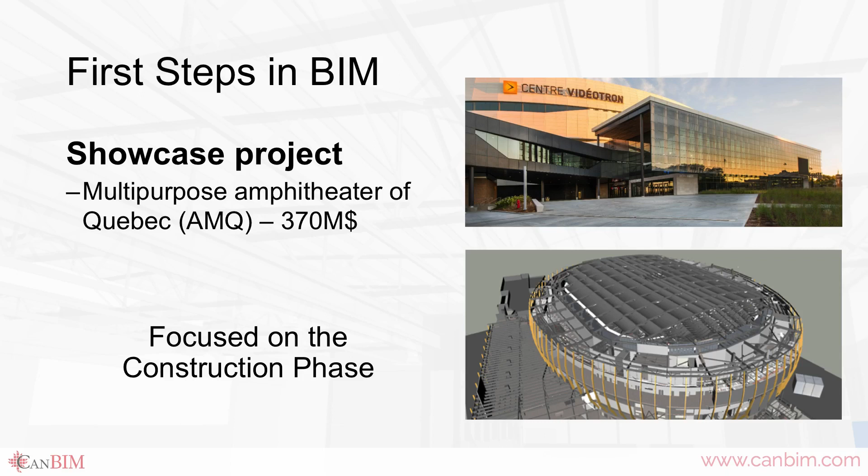How we started in BIM: we had the chance in 2013 to work on the amphitheater project. It's a project that was realized in traditional mode, and then we went to the construction phase.

We gave the construction mandate to Pomerleau, which had multiple technical experts. We took some plans for construction, and we integrated all the plans with BIM for construction.

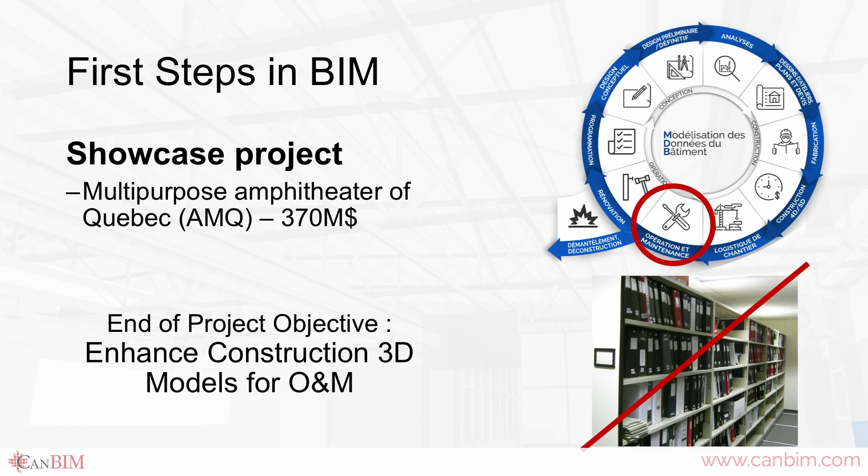There have been some issues naturally, but we finished at 370 million. It's not all because of BIM, but we realized the collaboration, the approach of having people around the table, the exchange between owner, contractors, and professionals was key.

We build before getting to the construction site. We actually get to the construction site and everything is there, no dismantling, no issues on the construction site, or much less issues.

We've seen this before where the plumber doesn't get along with the electrician or with other contractors, but there are plenty of benefits with BIM that helped us with the logistics on the construction site.

What helped us as well is a digital model. We have to have a 7D BIM model to avoid what we see on the screen, all the paper, the USB keys. We'll bring it under digital form to use it for operations and maintenance.

We delivered the project after that, and it was a challenge. We have to make a bridge between the projects and operations and maintenance. This is an organizational problem.

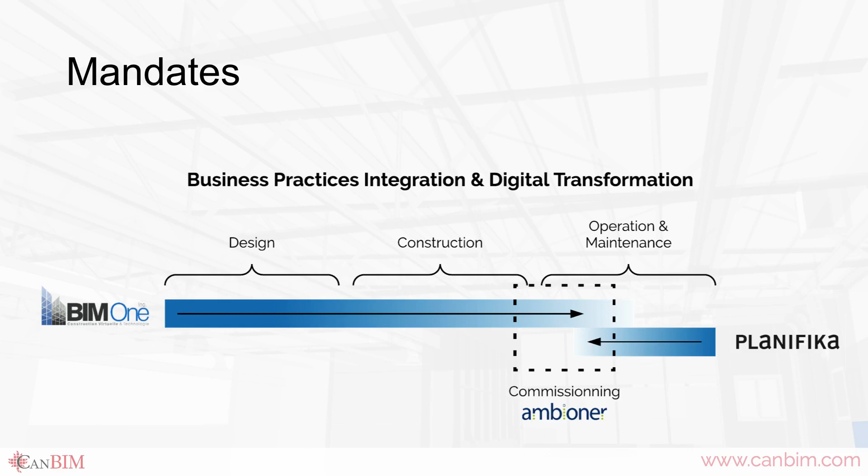So after 1 year of going into pilot projects with community centers, we wanted to start working with BIM regarding community service centers, and we realized that we have to request BIM basically on these projects. We have to work with some competent consultants. There's BIMOne that helps us with all the coaching, the processes.

Everything that's technology related in BIM. And we gave another mandate, which is by Planifika, which is asset management related to BIM. Define requirements, see in which manner the entire life cycle management could be optimized. During this process in the last year, Ambioner joined this process.

They helped us take into operations all the information collection through operations and maintenance. So we're talking about standards, the naming of equipment and systems, in which information do we actually transfer it to property management or operation software. We have our trio, and our first trio is right there on the screen: BIMOne, Ambioner, and Planifika. And what's important is we have some good results up to date.

So as you see, the City of Quebec went for a call for tender, and we won this tender. And we came in this context, and we had to put in place all these processes, and that was a challenge. The first point regarding this is I will talk about the BIMOne approach.

So as a client, I wanted them all, everything on the screen. So Frank told me, relax. So yes, ultimately we want to get there, but we have to start correctly. So this vision, these objectives that are very high.

And management said we will go in a big change. We don't want to create tribes or groups, some people that do traditional and people that do turnkey projects. So you have to break this concept. So we will do all our projects henceforth in BIM. So we said, Frank, let's go. But...

So we embarked on this, and we said it takes us some reflection time. We cannot just start these projects and expect everything will be great. We have to do a reflection exercise just to think about where we're going, because BIM is not BIM that does the work itself. It's people that actually work, and this involves processes and whatnot. So we've done a lot of coaching projects, and in this case what we did is we talk about 3 fields of BIM.

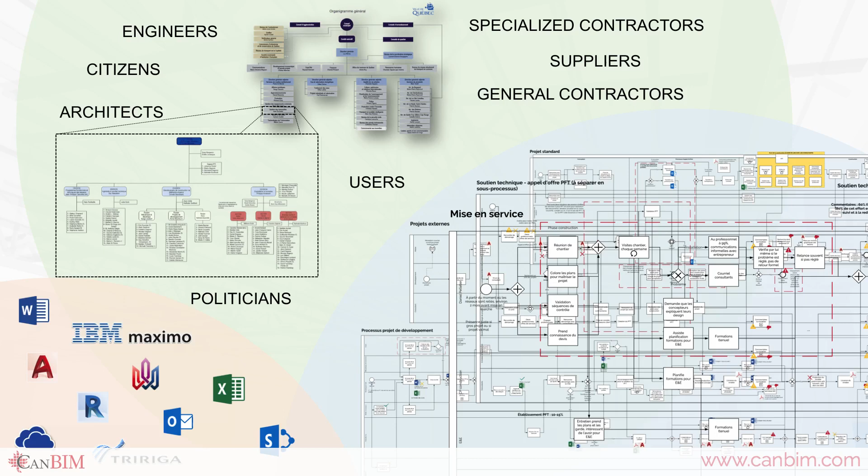There are different people, such as Bilal Succar, that talk about this. The first field has to do with governance, the people. We see in an organigram of management, an organizational chart of all the interrelations between the different stakeholders in the project and the organization. What is the relation between people on the project? This service is included in a bigger chart, the City of Quebec. There are a lot of different departments, and it's important to understand who needs what information, who has the approval mandate.

There are a lot of people involved: specialized contractors, suppliers, users participating in this project. We had to address all this, so we did some interviews with people, process interviews, etc. For people who think BIM is only for professionals, architects, and engineers, you're wrong. It's everybody, the entire chain, everyone.

There's a lot of work that was done regarding this, and we based all our reflection on the processes. If you want to innovate, if you want to bring lasting change, you have to change the organization. We cannot just change the technology.

First, there will be some challenges, and we know there's a hype chart. There will be some high expectations, and at a certain point it doesn't work. So for it to work properly, we have to have a proper organization.

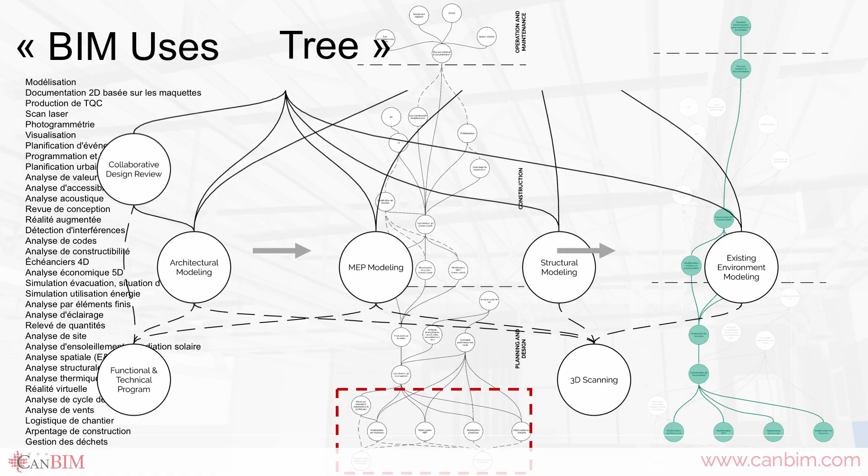When we take a look, the conclusion, or the ultimate objective, is to have models that we can use. And with that, the City of Quebec, being a client, being an owner—even if there's a service of updating the models—the starting point is the professionals for these BIM models, the architects, the engineers, etc. So we had to do an exercise of structuring all this information and all these BIM models.

So once we clarified all these situations, we had the list of tools to develop, to clarify what we need. We created this chart that breaks it down by theme, and it allows us to know how we can frame this information in a way to deliver the project.

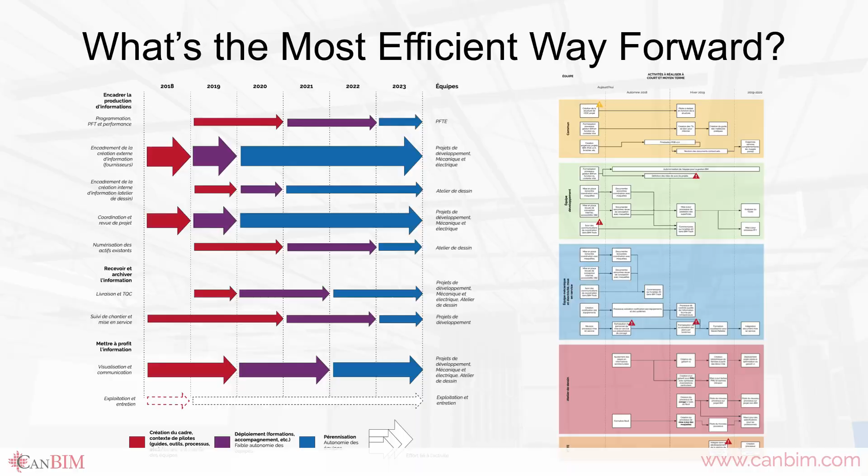Projects that are assimilated. So we see also another program which is team by team. Every department will have a group of activities that is planified to transition into BIM and to have a BIM process. You did a great job, Frank.

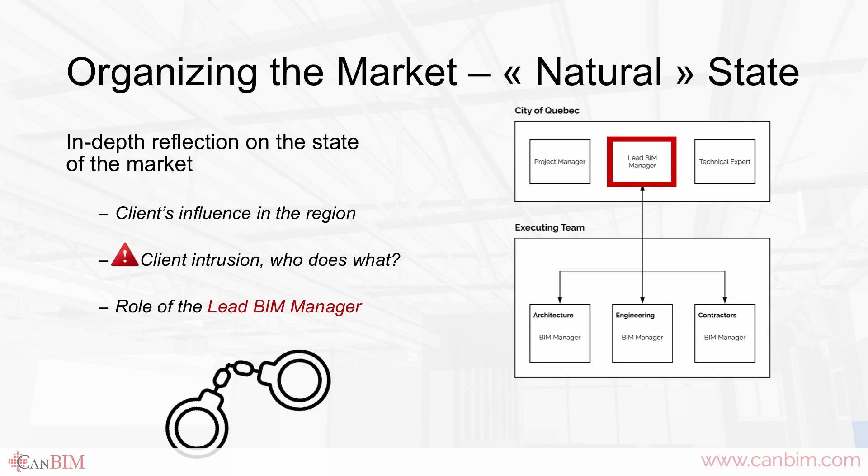So we had a reflection regarding this because we had an important client, but we had this management of the client towards the professionals. So instead of asking a deliverable from the professionals, we communicated a lot about ways of doing and management, and we handcuffed the professionals basically with their ways of working because of past projects.

So BIM changes all the time as well. So when we follow the evolution, it's important to keep in mind the norms and the standards, but you have to keep in mind that within 6 months, all the technologies can change, and the actions that were very useful 2 years ago, today are not pertinent anymore, and vice versa.

And people will penalize you on projects. So there's this whole notion. There's also something we noticed: the lead BIM manager found on the client side had a different understanding of the market, because people expected the lead BIM manager would be responsible for coordination in the collaboration spirit. The BIM manager is responsible for collaboration in terms of BIM models.

So we have a problem because the client had to coordinate all the models, which is not his role as a client. So we worked to redefine this to say the lead BIM manager will have one in design and one in construction. So the management of professionals remains in their court, and we have a new transition towards documentation. We started coaching people at the city so that lead BIM managers would report to an expert to approve the good ways proposed by the professionals.

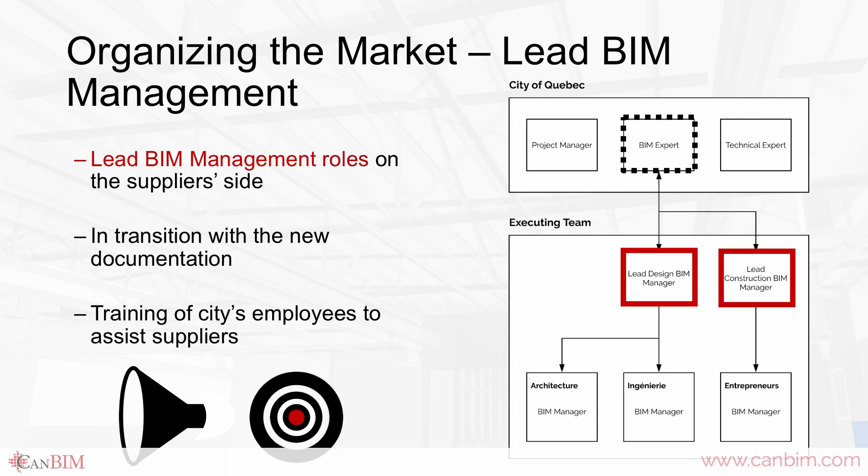And we are not in this prescriptive mode where we force people to do things a certain way, but the work gets done in an equivalent way.

I just want to mention that there are 7 pilot projects. So all these things apply to these 7 projects, and we had some issues when we readjusted. We don't have a project yet that has done the entire cycle or an entire life cycle, and this is why we're always having these reflections, and this is why BIM1 is defining all these requirements on paper.

So regarding documentation, we see historically that in Quebec we have this distinction between the BIM management plan versus the BIM execution plan. So BIM management is on the part of the client—it explains what they'd like to have. And the BIM execution plan explains how they're going to execute the project.

So we saw that many BIM management plans included a lot of execution topics. So we reduced this and took out the sections that apply to execution, moving them to the BIM execution plan. And we had some documents that were very long, and we reduced them to 20 pages.

And the documents currently are much more prescriptive than descriptive. The level of maturity is not the same for all stakeholders, and there are some just starting out in BIM. So we had to have some documents that are more application documents, explaining the philosophy behind it. The documents are much more prescriptive and direct, but they're also flexible.

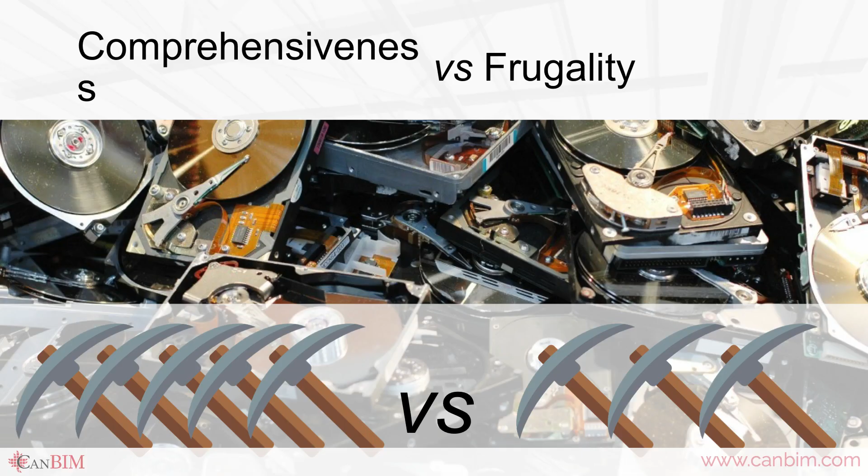So administratively, it's a lot of work to collect data, a lot of data re-entry, because a lot of technical data comes in PDF format, and entering it in the database means a person is entering it manually. It's done by the client, but also by contractors. And because there's a human entering this information, there's always a risk of error. So there's information that is validated by the manufacturer, but you're putting another layer of error because someone is doing data entry in a structured database, and we have to do quality control. So there's extra work to be done.

So versus frugality, we only take what we need, so we have only the information that we can control much more easily. And also there is a cost associated to that, because it's not done automatically, there's a cost associated to this. So it represents a certain challenge to work in this case.

So when we are trying to find the essential information, we are diminishing these costs. And another consideration is a lot of people are involved in this process versus one person. We know it's not just one person involved, but it's the principle of having fewer people working regarding the added value.

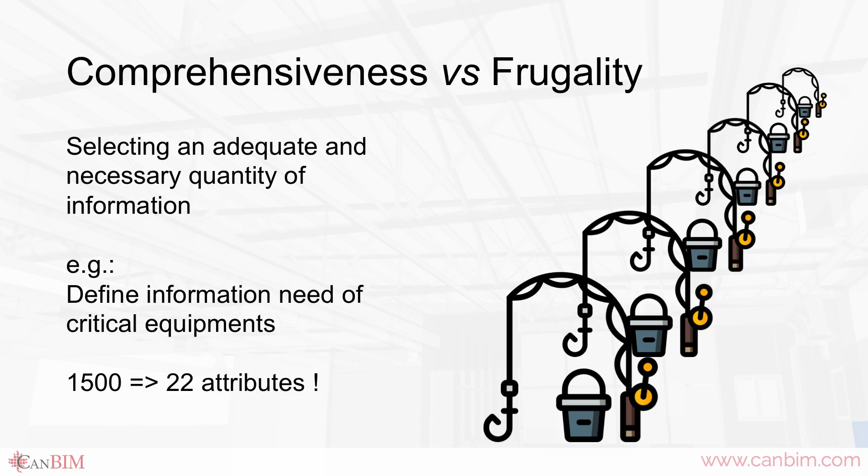If you're getting all this information and you select the actual element in the model, or you scan the actual element and go into the technical specification sheet, do you actually get your objective? The majority of the answers is yes. So we could start in this way. It's a tiny improvement, but has huge added value.

So it's not because we weren't frugal at the beginning that we can't improve this. The start is much better. So the notion behind this, and there's a conference right now regarding COBie, is that we talk about standards. When we talk about operation and maintenance, we talk about COBie.

But you could also check out what is happening with IFC4, which allows you to have the information stored in IFC4 versus COBie, and people aren't used to using these standards, so it's important to choose the right format.

So we took a look at these possibilities, and we have some parameters that identify the specific parameters of the city. We speak French, as you know, so we had to look at parameters in French, taking into consideration translation from English to French as well. So the connection between Revit and Maximo required us to redo our export standards. But when we talk about technical work with COBie, we work with XML.

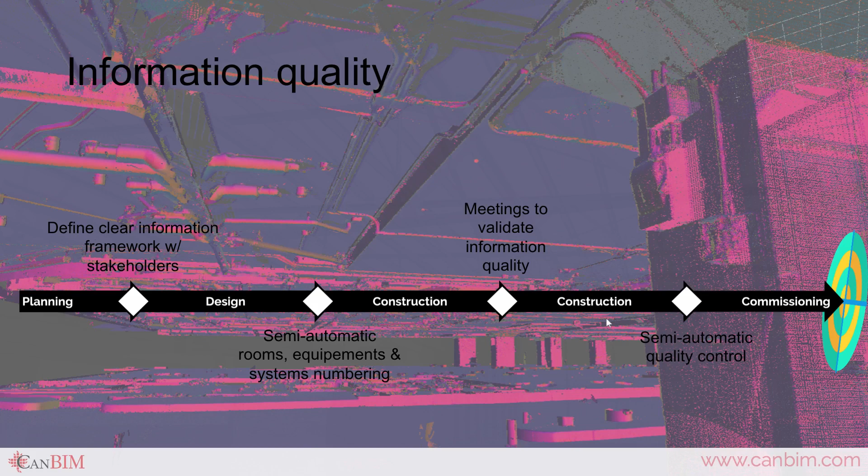We want to make sure that people actually start early in the process as well. This is one of the big advantages of BIM, the visualization, which will allow simplification. So we had some meetings much earlier in the project with people that were not integrated into the project before, but now they are.

We also put in place some controls where we have design models that are coordinated, and then there's the construction reality that arrives. How similar are the construction models to the design models? The construction models will have some differences due to construction constraints. So we want to make sure that the models we receive - we were talking about the digital twin earlier - are similar to the actual construction, so we can all benefit from BIM and use these models in operation.

So all these actions, all these milestones and all these tools lead in the same direction, and the purpose is to have a BIM model that we can use for commissioning, that we can actually give the right information to the right person at the right moment. These are all big themes today that we presented in this project, and this is everything we wanted to present today.

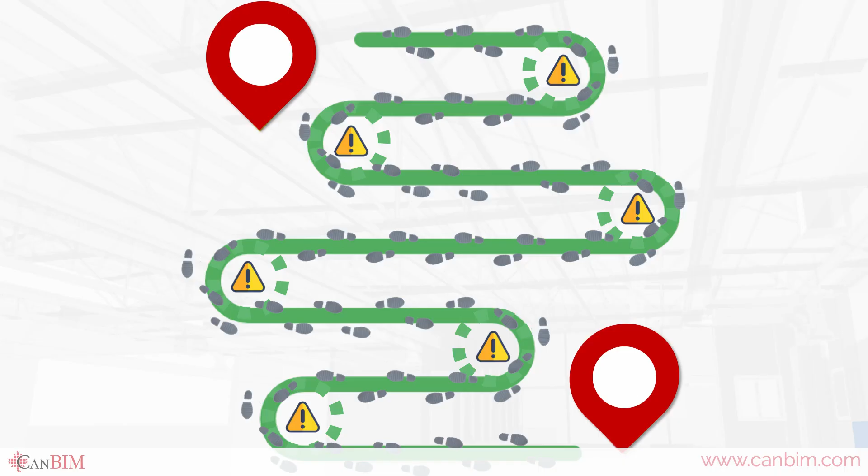A lot of times we say we want to start with technologies, and this is one of the success factors, key success factors in that case. So this is it for the presentation. We will keep working on this, it's an evolving process, and I just want to know if you have any questions regarding what we just presented.